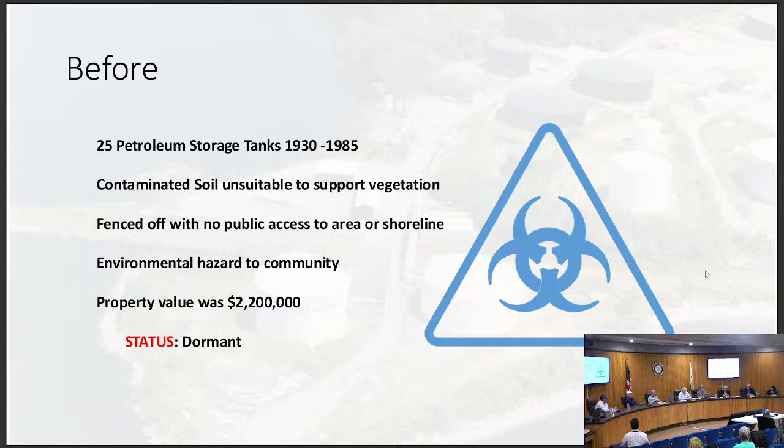The soil was contaminated and the site was fenced off. There was no access to the shoreline. It represented a real environmental hazard to the community, and the property value prior to development was assessed at only $2.2 million.

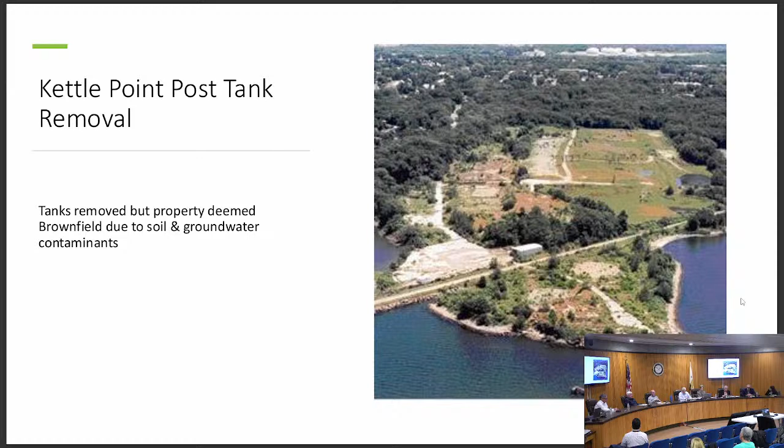After the development, you can see the site - the tanks were taken down in the mid-1980s. Even though the tanks were removed, the site was still considered a brownfield, and the soil and groundwater was still very contaminated. But you can see the outline of the property, the pier way at the front there, and where the train tracks went through the property, which now is the bike path.

Very interesting to see how despite the tanks, it looks like a nice piece of property, but essentially was still highly contaminated. As development began in 2015, 2016, I'll go through the different phases, but fast forward to 2024, we've got public access to the waterfront, 20 plus new parking spots behind University Orthopedic that service the East Bay Bike Path, and the new pier, a 600-foot boardwalk open to the public that gets a lot of active use in the summer.

Even all season there's 62 new townhomes, 228 apartments. From what I understand, all the townhomes are fully occupied, and I believe all the apartments are fully occupied as well. There might be occasional vacancies, but there's no large segments of vacant apartments. The new medical building originally had 225 employees, but I think they're probably over 250 now - it's a pretty substantial piece, a major part of University of Orthopedics.

Fast forward, this report will illustrate - when we started pre-construction, it was 2.2 million in assessed values. The property values through the most recent assessment report show that the values exceed $98 million.

Again, just to visually show what the site looked like before it was fenced off - even though it was fenced off, people made holes through the fence and there was access to our property. People were trespassing and probably exposing themselves to harsh chemicals, not knowing what was out there. As you can see in the other slide, it's a much more welcoming piece of property now with a very nice wall. And Ray, you were involved in the development there as well.

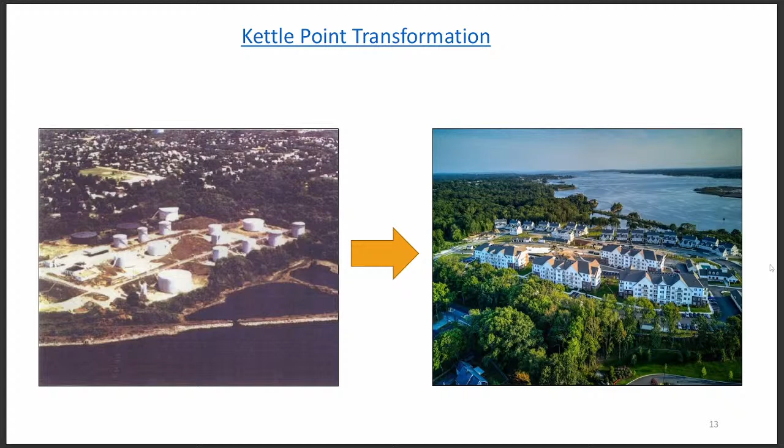This is a real life case study of when development takes place. Not all of the impacts are adverse - in fact, they're positive impacts. Obviously there are challenges, and different developments have different attributes, but I think this is overall a very good case study of a positive development leading our city, compared to something that was just vacant.

It probably would have never been remediated unless a local developer stepped forward and partnered with the city, where the city would make public improvements allowing the property to be remediated. From what I understand, it was like 30,000 cubic yards that was remediated at the site, which otherwise would have seeped into the groundwater, potentially very detrimental to the groundwater supply in some of the neighboring community and also the Upper Bay.

Just wanted to provide that. We'll have this on our website along with the independent report that shows these numbers. East Providence is one of the few cities that have done a TIF. We just have some examples of how TIFs work - these are just illustrative examples, but we have enough safeguards in place.

Even if the revenues don't support the debt service payment, the city's general fund or city's obligations are never going to be impaired. If there's a shortfall in the revenues to support the debt service payments, a special assessment would be placed on those properties within the district. So there's really no recourse to the city here. It's really been, I think, a net win for the community, and I just wanted to report that again.

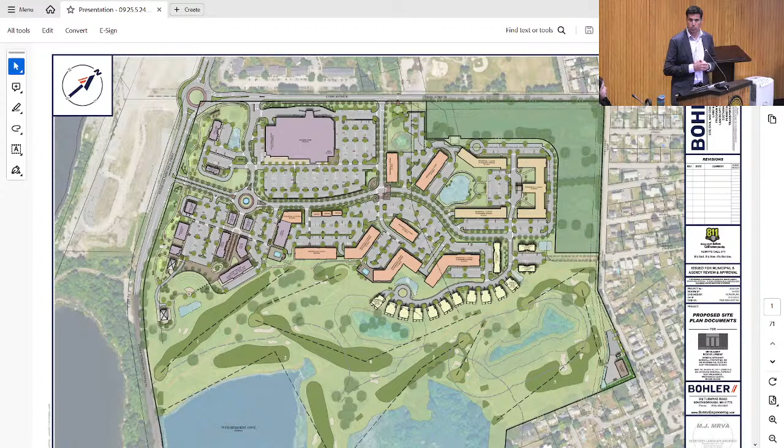What we need to do is capture and hold that stormwater and release it into the locations where it was already going before, essentially the same flow as it was before. So that requires storing it on site until it can infiltrate at a rate that would match the previous flow. Those calculations have all been provided to Pare Engineering. They peer reviewed our original submission, had a few comments on our approach, and we've made some modifications as a result. The new plans we believe are going to satisfy their comments.

And then, I know DEM isn't overseeing the stormwater aspect of this - is it CRMC? CRMC, yes. So they obviously look at the plans and see how it impacts the cove and runoff of that nature. They're being updated as these plans are developed, and they'll have oversight over this. Thank you. Any other questions?

Go ahead with the next witness.

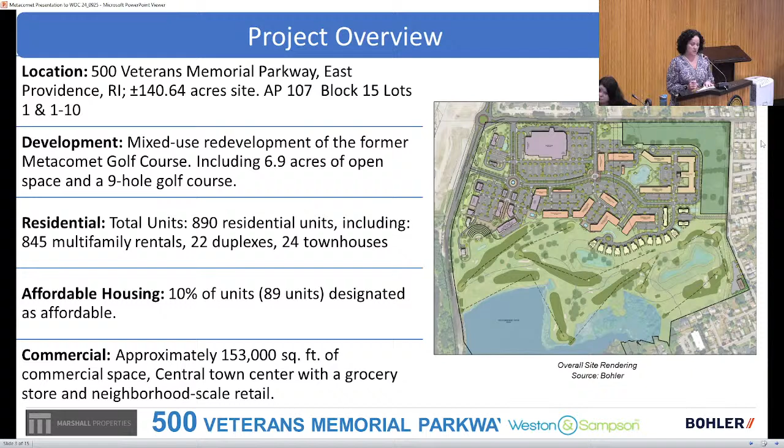So to give you a brief overview - some of this is a bit of a repeat, I won't go into great detail - we're talking about a mix of commercial, retail, residential space, open space, and recreation space. The project attempts to really try to fit into the fabric of the neighborhood, pushing buildings back along Veterans Memorial Parkway with a roundabout at the intersection of Lyon Avenue and Veterans Memorial Parkway. There is a report from Forward Planning, which I'm sure you've seen, that speaks to the general tax revenue that can be expected and the job production that would be created, with over 3,500 temporary jobs for construction and 630 permanent jobs within its first year of stable operation.

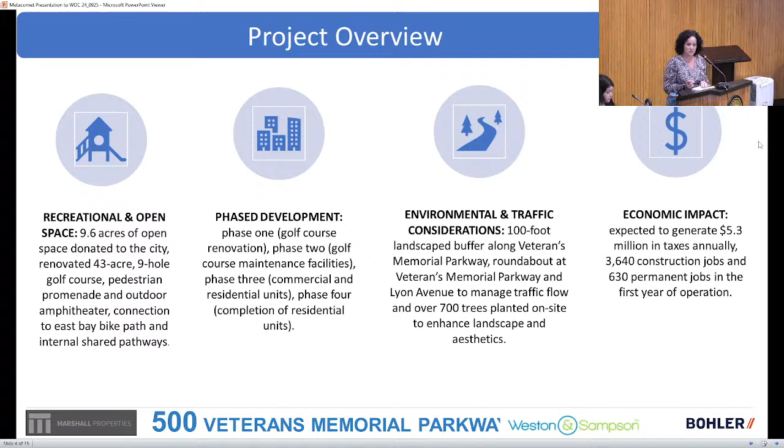So I wanted to talk to you a little bit about consistency with the zoning ordinance. This project is requesting 3 variances from the zoning ordinance, and I wanted to go through those with you and speak to those.

One of those is for a signage variance. This is to install a monument sign at the entrance. The district calls for signage to be placed on walls, not monument freestanding signs. The reason for the request is that if we were to put signage on the buildings, they would be set back over 100 feet from Veterans Memorial Parkway. We would prefer to request the variance for the monument signage at the front entrance, and allow those buildings to be set back. The intent is to protect the scenic view on the parkway.

The sign will be built at a reasonable scale to fit in with the character of the parkway and the signage that is already there. There is monument style signage on the cluster of buildings adjacent. It would be similar in form and function, but allowing a monument sign instead of requiring that signage on the side of buildings will allow those buildings to stay back from Veterans Memorial Parkway, which we feel is an important aspect of the project.

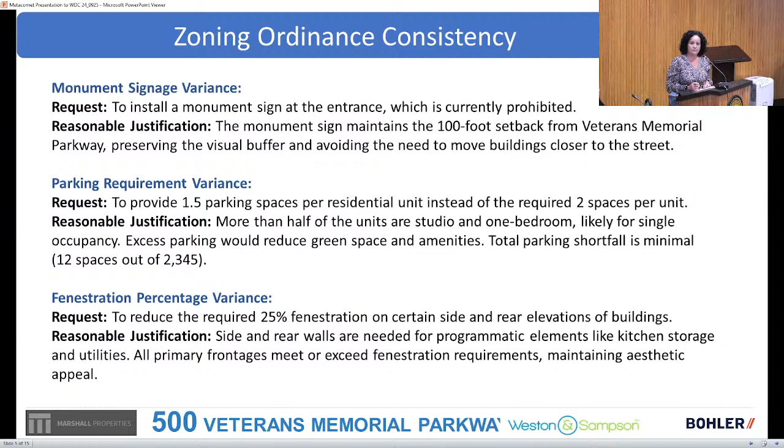I also wanted to speak to you about comprehensive plan consistency. In the report, there is a table, table 2, which starts on page 10, that goes through certain elements of the comprehensive plan, provides the text from the actual comprehensive plan, the location of that text, and then a comment as to how we believe this project fits with the goal, the policy, the action, or just the general text of the document.

So what I've done for you in the slides is just give a very high-level summary of each chapter highlighted in this table, the general requirements or requests for development, and some examples of how we meet those. The table itself goes into a lot more detail, and I'll go through each of the sections at a high level.

The first section is the general plan, which is the text and discussion that happens outside of one of the specific chapters of the plan. It talks about ensuring a quality of development. In this project, we're providing a range of housing, service businesses, open space, and recreation. It is truly a mixed-use style of development through high-quality design, so we feel this proposal meets that call for high-quality design.

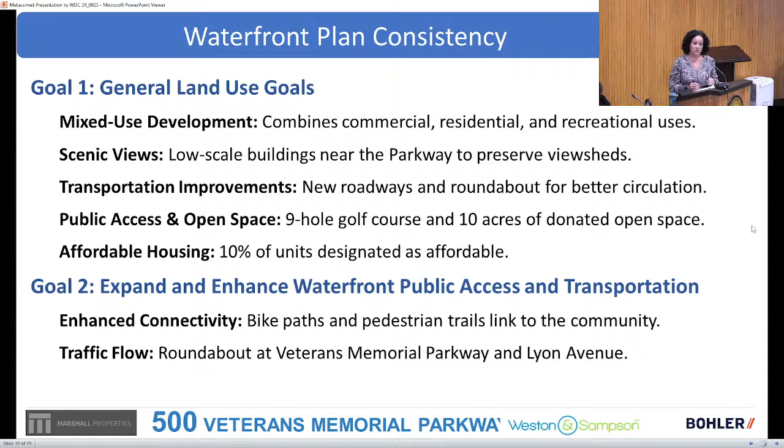Goal 2 speaks about expanding and enhancing waterfront public access and transportation, specifically enhanced connectivity. We intend to have those shared paths connect directly to the bike path. It also talks about traffic flow. There's a proposed roundabout at Veterans Memorial Parkway and Lyon Avenue, which is identified in the waterfront plan as an appropriate traffic mechanism, noting that traffic signalization is not appropriate. The comprehensive plan, in the specific district for this area, also identifies this exact intersection as the location for a roundabout.

Goal 3 is to enhance the waterfront special development district's economic development opportunities. A lot of this is similar to the comprehensive plan, as it should be, since those documents should work in concert. It talks about business attraction, supporting new businesses, job creation, and creating year-round activity on the site. We believe that with the mix of uses being proposed, we are ensuring continuous year-round engagement on the property.

Goal 4 speaks to enhancing the attractiveness of the project area, specifically providing for structured parking. While this project does provide some surface parking and some structured parking, we've designed the surface parking so that it is not vast expanses of asphalt, but broken up into segments with sufficient landscaping throughout to really create a feeling like you're not in a giant park.

It also speaks about public spaces and well-defined streetscapes and gateways, with the installation of a roundabout at that primary intersection. We believe that would essentially create that specific gateway bringing people through Veterans Memorial Parkway and into the city via Lyon Avenue. It also talks about pedestrian and bicycle infrastructure. The plan is designed with sidewalks throughout, and a connection to the East Bay bike path across the street through the shared path system designed for it.

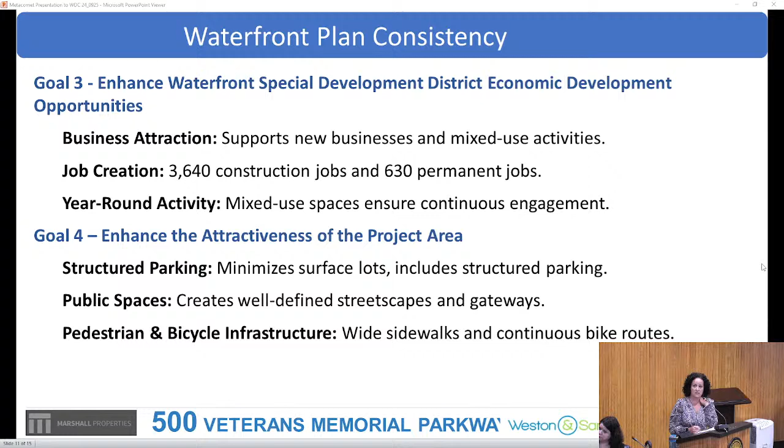Goal 5 speaks to protecting and enhancing the natural waterfront environment. As I said, we are staying away from the cove, staying away from the more natural and environmentally sensitive features on the site, and maintaining a buffer zone, limiting development away from those.

Goal 6 speaks to revitalizing existing commercial areas, enhancing the appearance, and creating a gateway. As I said, the roundabout at Lyon Avenue serves as a key entry point in all directions, giving you access eventually down to the parcels right on the water.

Goal 7 is protecting existing residential land uses on Roger Williams Avenue and Veterans Memorial Parkway. As I said, there is proposed to be at least a 100-foot landscape buffer along the parkway to maintain the greenery as you drive along it, along with traffic mitigation measures, such as the roundabout, managing the flow of traffic to prevent shortcuts through residential neighborhoods.

Now I want to talk a little bit about the context of the neighborhood adjacent to the property. To the northeast, you have existing medium density residential development. The project attempts to preserve that current view. This is the area with an almost 10-acre donation along Fort Street, maintaining that neighborhood character and keeping buildings set back from any adjacent residential uses. The first set of buildings on that side of the site are also residential.

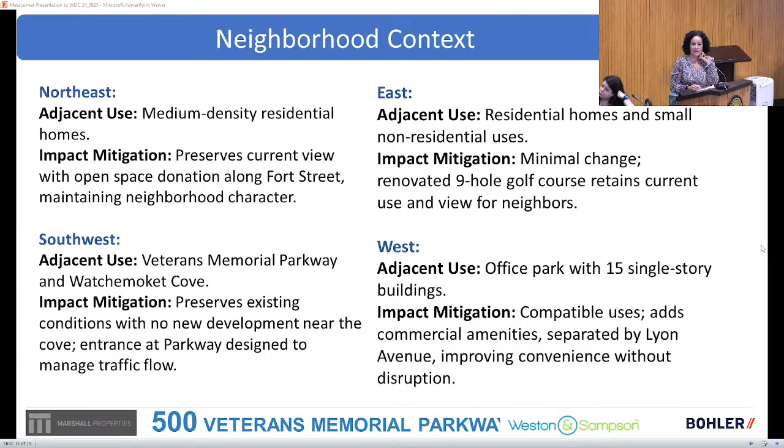To the east is also residential homes and small non-residential uses. We again believe there will be minimal change there, and they'll retain their current view of the golf course area. To the west is the small office park I mentioned, with single-story buildings. We believe the uses proposed will be compatible with this adjacent use. They are separated from the property by Lyon Avenue and would improve convenience between the two compatible uses without any real disruption to what is happening in that office park area.

So just to summarize the findings as we went through your regulatory documents and compared them with the proposal in front of you: we believe this project is appropriate and compatible in scale, proposing traffic and infrastructure improvements already contemplated in your waterfront plan and comprehensive plan. It achieves or partially achieves open space goals by obtaining 9.6 acres for the city to hold title to and preserve. It enhances recreation by opening what was previously a private golf club to the public, provides a mix of uses with residential, commercial, open space and recreation, capitalizes on a redevelopment opportunity while maintaining recreation space, provides a positive tax base, and establishes over 600 permanent jobs at a variety of pay scales, plus needed market rate and affordable housing.

So in conclusion, we've found the project is consistent with your zoning ordinance, subject to the variances requested, and we've provided rationale for those variances in the report. We believe it's consistent with the goals, policies, and actions of your current comprehensive plan, and also consistent with the waterfront special development.

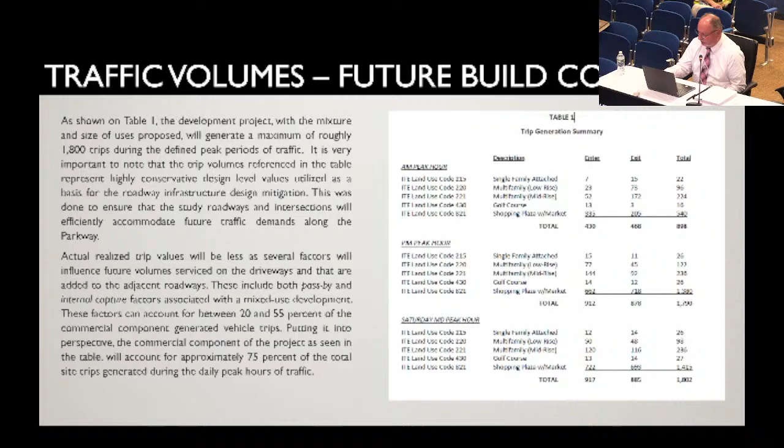And we show what a future potential would look like, so you understand the type of numbers that use would actually generate minus all the pass-by. So we wanted to demonstrate that and use it as a basis of our analysis.

The commercial component, which represents roughly 75% of the peak hour traffic, would have a distribution that's more even than, say, the residential use. So you have the morning commute.

Commercial component opens up mid-morning to late morning, to the midday period, which is a higher or average condition. That six hours between 10 and 3, 10 and 4, volumes would be relatively consistent. Wouldn't have a high for that.

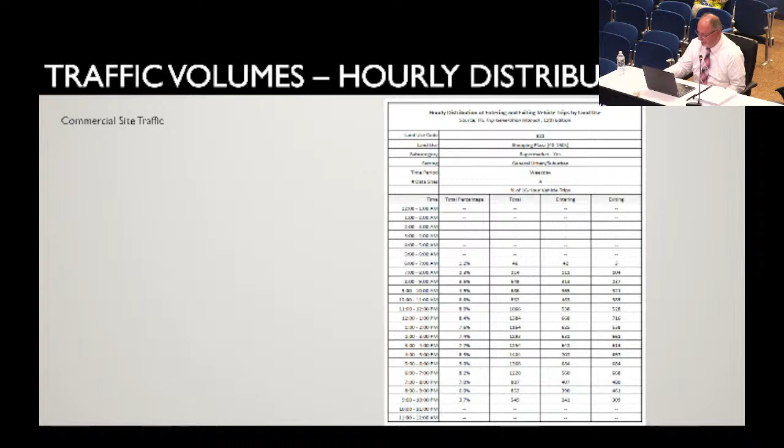Once we estimated the type of traffic relative to volume, we had to estimate where it's coming and going. The commercial component, with the grocer being the anchor, we anticipate this component of the project being a neighborhood type commercial element, a shopping center. Most of the people in surrounding areas are presently serviced by shopping centers, the markets on Morton Ave, the Shaw's, the Stop and Shop, or the Route 6 corridor in Seekonk - Stop and Shop, BJ, Walmart, post Whole Foods. So that area of the community is highly serviced with this type of use.

The area to the south is void of a grocer or competitive grocer. Going south into Riverside, Pawtucket Ave, Willett Ave, it's one market - an outdated, small Shaw's, prices that are high, quality and quantity of product is less than when you have a highly competitive market across the street.

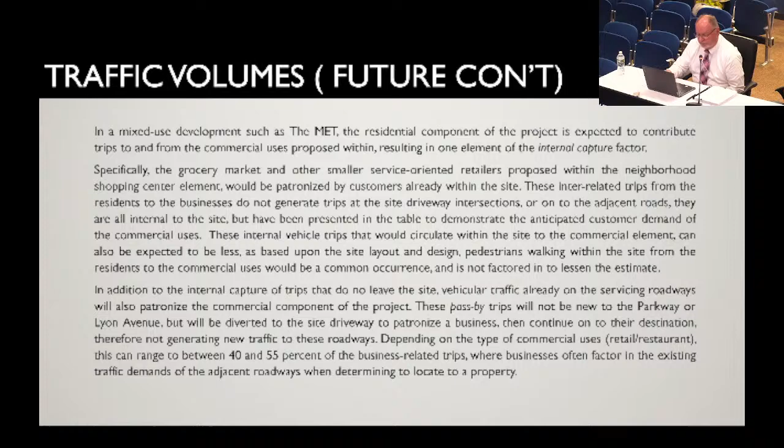Looking at that, we provided figures in our report that showed the distribution based on that type of analysis of where our competition is, what the servicing roadways are. We looked at different distributions for the residential component and commercial component. So that's all been included in our study, and figures are provided for each of the periods.

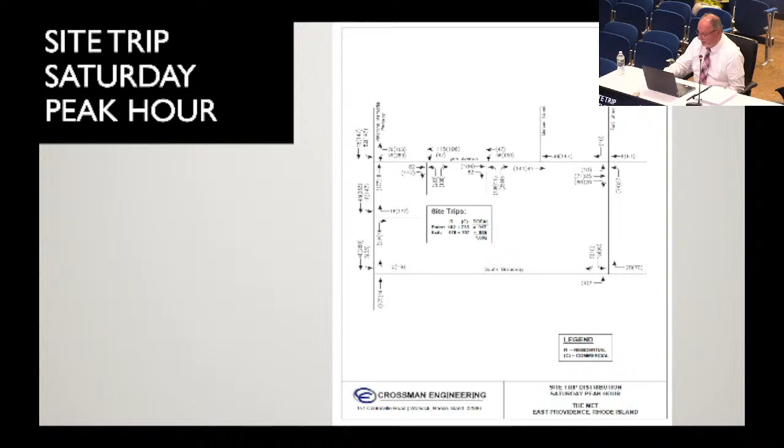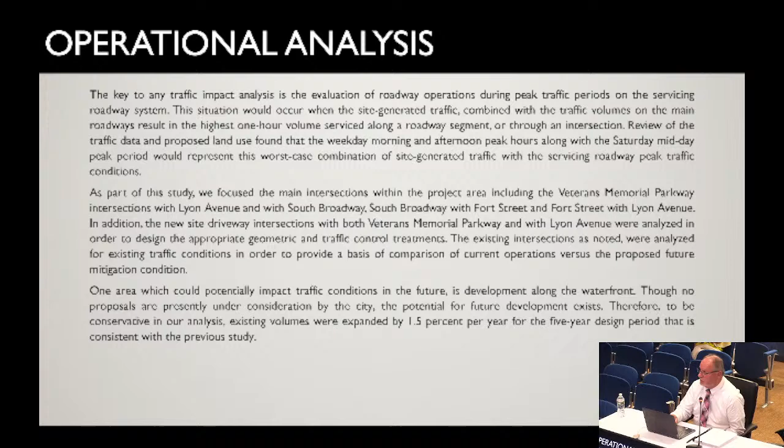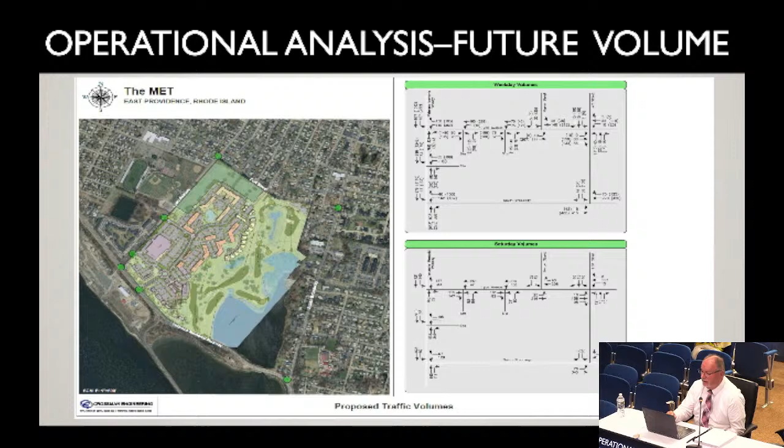In the report we show what that distribution and overall volumes are. The slide shows the development itself and then the key intersections we have. Based on that future condition, as presented in Figure 5, we determined that improvements were necessary along the Parkway. As I indicated previously, it initially had proposed control at a driveway on the Parkway. When I got involved and worked with the team, having knowledge of the Parkway, we redesigned the access to the property.

So it did conform to what was considered over 20 years ago, to provide future access to the waterfront, but also service this development up on the Parkway. So we've proposed the roundabout at Lyon Ave. Our main driveway will be restricted from left turns out, so we're just shifting an existing driveway that has full access to a driveway on the Parkway that has a restricted left turn exit and access.

Primary southbound egress from the site will be from Lyon and through the roundabout. So we feel that the design proposed will be consistent with the goals that have been discussed for the Parkway and access to the water.

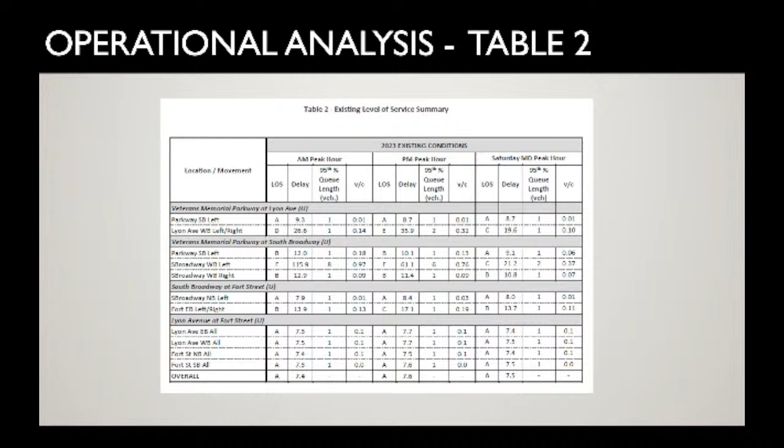East Bay Bike. The operational analysis we've presented shows both existing conditions - the level of service internally within the neighborhood, the intersection, level of service A today. The only intersection that operates at a lower level of service, or movement I should say, is the South Broadway intersection. I was involved in that back when the Bold Point was being considered.

That's when I worked on restriping the roadway to provide the left turn. We couldn't before, so it would back up, or people would drive on the shoulder, on dirt, to get around. So it's just a better operational condition, what we're proposing there in the future, and it was also recommended in peer review. Geometrically it's odd, so we're going to make it a conventional T intersection.

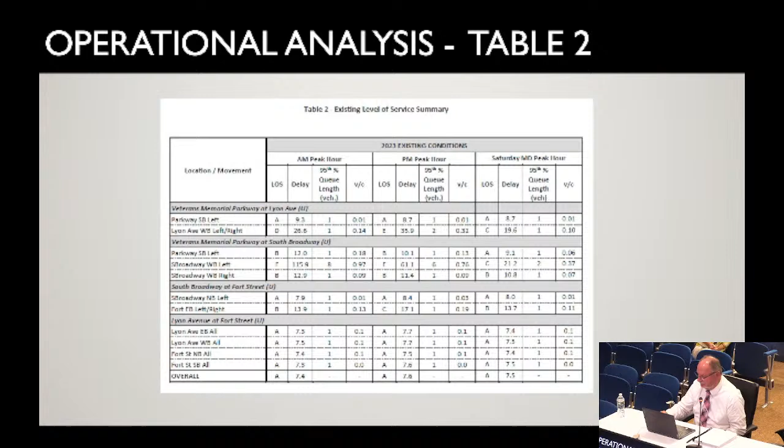Modifications to reduce speeds through the intersection help people drive along the parkway up Broadway. With the concern, feedback speed limit signs have been put on South Broadway to help with trying to moderate speeds. So that is a concern.

Under future conditions, that will remain, but we monitor that with the Department of Transportation to see what, if anything, needs to be done relative to operation. But the roundabout itself will operate efficiently, and all the internal intersections as proposed.

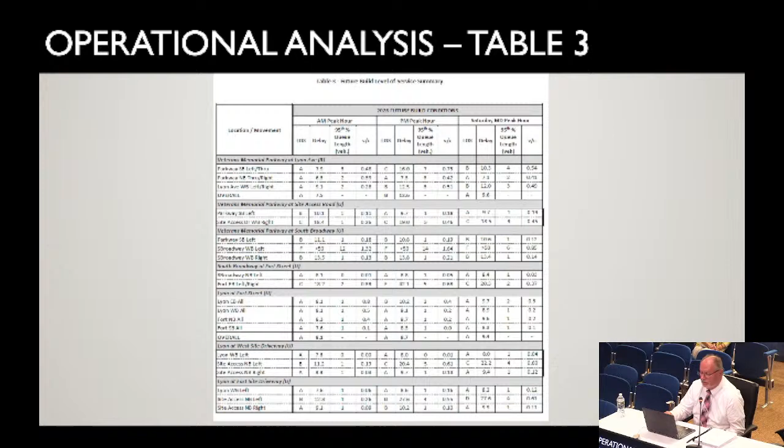We'll work with the city in an effort to mitigate cut through and intrusion within the neighborhood, at Mercer Street. As part of our initial application with the DOT, coordinating with Public Works, we would propose to restrict that intersection with the parkway to a right in, right out. It's configured as an old type Y intersection; we can go left or right for both approaches, so it's an easy fix.

Safety is a concern at that intersection because sight distance is insufficient to the south along the parkway to make that movement. So that'll remove that potential cut through between our site, and that's an initial element we will include as part of our DOT submission.

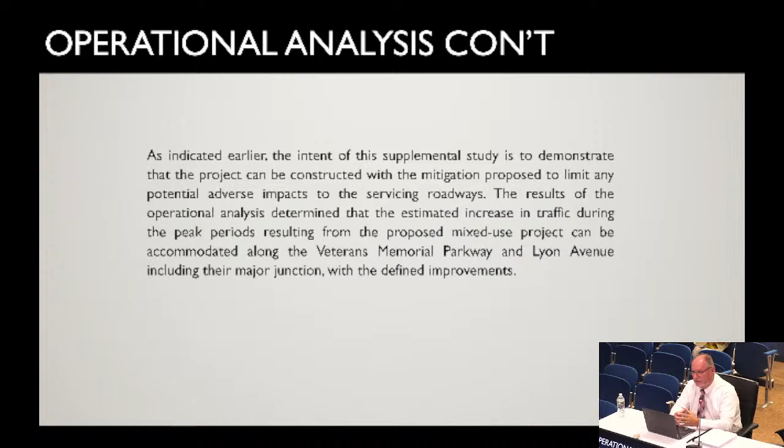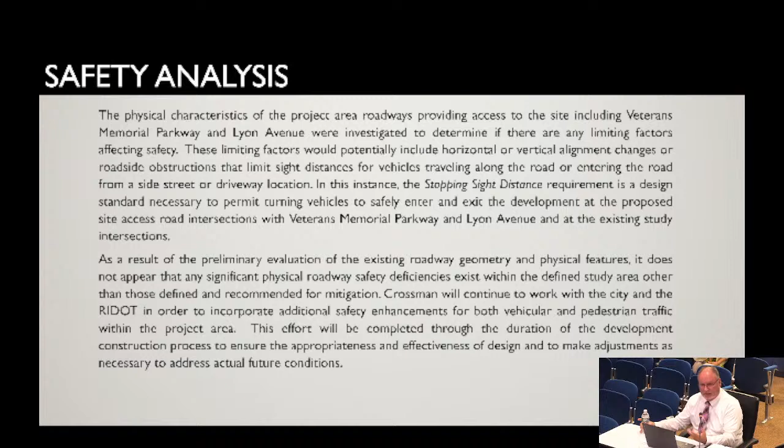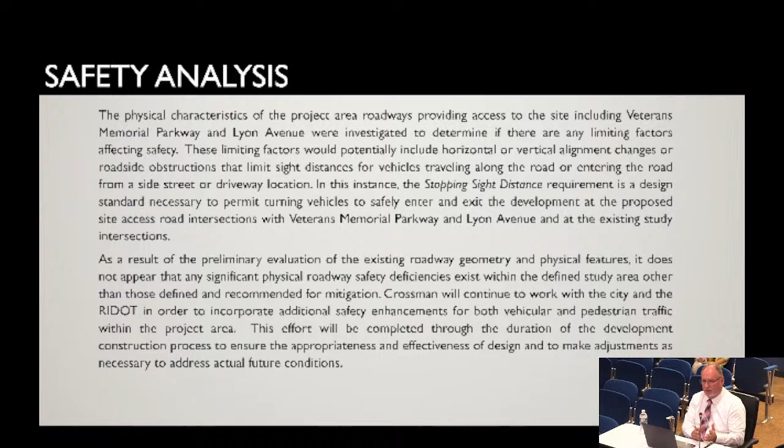In addition to operational analysis, we were requested to do a safety analysis. So as part of the updated report, we've looked at sight distances, driveway intersections, also design of the roundabout, designs to provide for efficient movement. We'll provide those as part of our report.

At this point, we've provided a comprehensive report, submitted to the department, and received a letter from them regarding what we've proposed. That letter, received back in June, will allow us to submit a formal application with the actual design of the roundabout for final approval.

As part of that submission, one of their comments was that it's typically a requirement on DOT projects when we do roundabouts internally that the roundabout be coordinated and peer reviewed with an independent, separate consultant. So in retaining the designer, they will work with us to provide the documentation needed in the design process for a roundabout.

They'll also do a VISSIM analysis. That's a computer program that allows you to provide detailed design treatments of a roundabout, particularly some peculiarities of a roundabout that are detailed in the VISSIM analysis. You'll be able to see how that's provided as part of it.

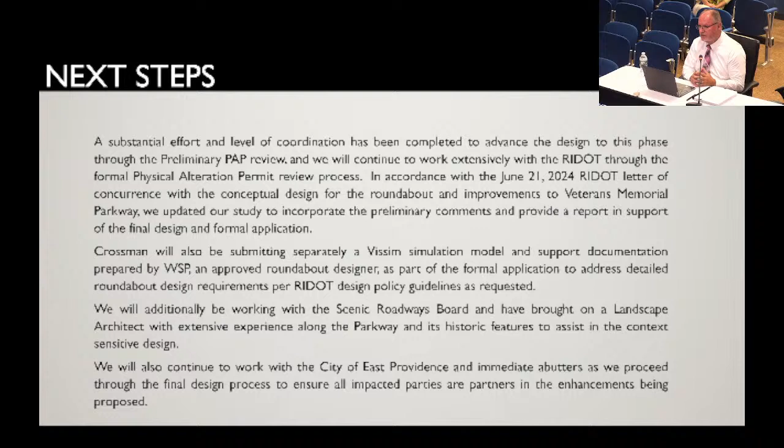Safety enhancements and traffic calming measures - we'll continue to work over the project development to make sure that happens. On Versa Street, we discussed options with Public Works to include modifications around the school and field complex that would essentially eliminate traffic from our site. That's a long-term solution we discussed.

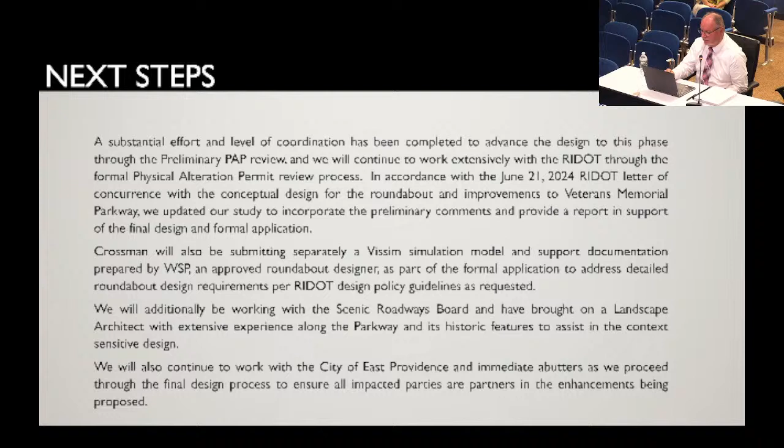Our driveway - we're working on the design of whether we have a separate left lane or two lanes to the roundabout. That additional lane will be a right turn in at our property, and then the right turn out of our property will pick up and create that second lane. Going through the roundabout, it'll be a two-lane roundabout on two sides, on the southern side.

Each approach will be two lanes. We'll be designing it for that future access, which was a requirement for the DOT approvals, that we would consider that future access leg of the intersection.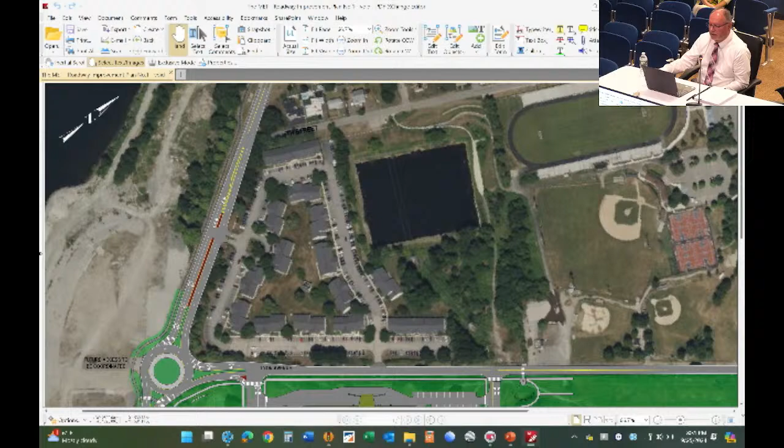And as you go north, the transition from the driveway - safety at the office park driveway - we're transitioning to two lanes heading south. We're going to put in a left turn pocket lane for them so they're not taking their lives in their hands as they do today. So we're providing a separate lane along Lyon Ave where we have our driveway component.

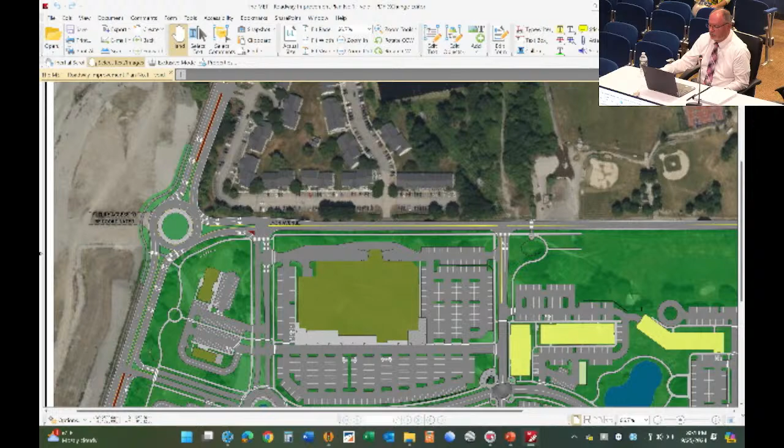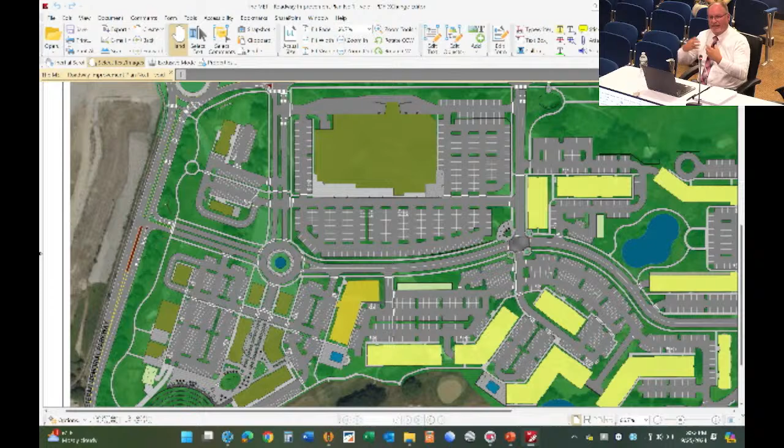The VISSIM analysis will show how that will operate, whether we make any adjustments relative to offset distance in the roundabout and our main residential driveway. We also have a lot of internal connectivity, so internally on the main roadway, all the traffic that's in the site doesn't need to go out. We have driveways offline with actual pockets. Same with the residential, there are multiple driveways. So the main intersection, which is a four-way stop, the eastern driveway will operate efficiently, and all the traffic into the site will be accommodated.

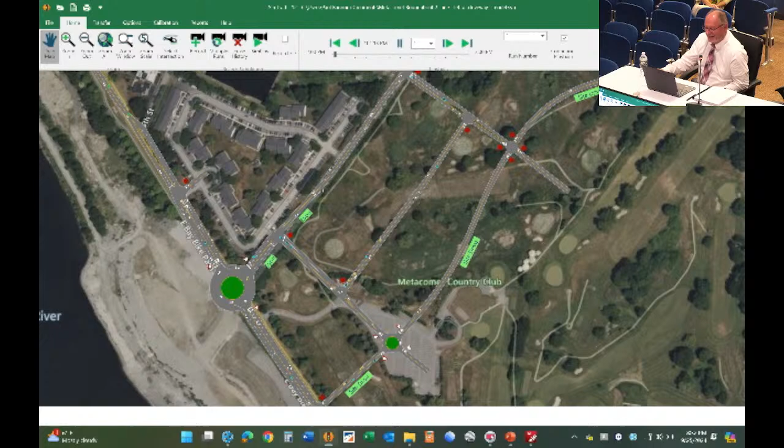This is a simulation that we use. It shows the operational analysis that we have completed in the study. This is a product of that analysis, so we use this to show the results.

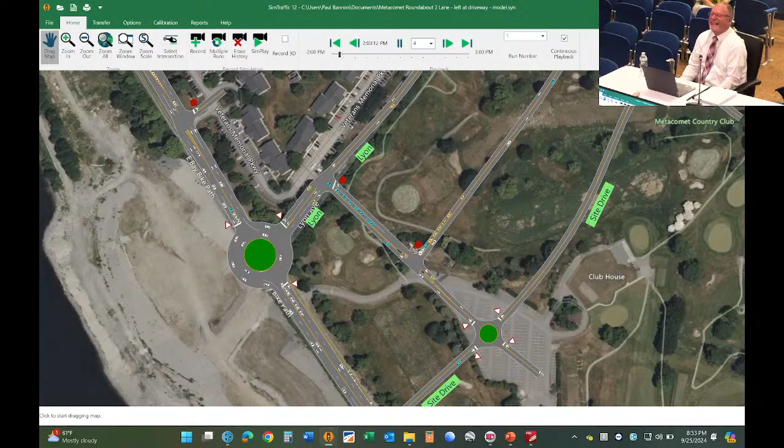You guys don't look at the screen, you're gonna miss it. Oh, it's right in front of them? Oh, okay. Oh, sorry. Wasn't here early enough. You guys were.

We use this tool to confirm our design relative to the traffic signal, that it operates properly, that one approach isn't overloaded, and to check stacking lanes - the length of stacking lanes required if the queuing exceeds. We use this as a design tool. The VISSIM analysis is on steroids for this - this covers basic radii and lane widths, while the VISSIM analysis actually uses the actual CAD chart to simulate road layout. This is a tool we use.

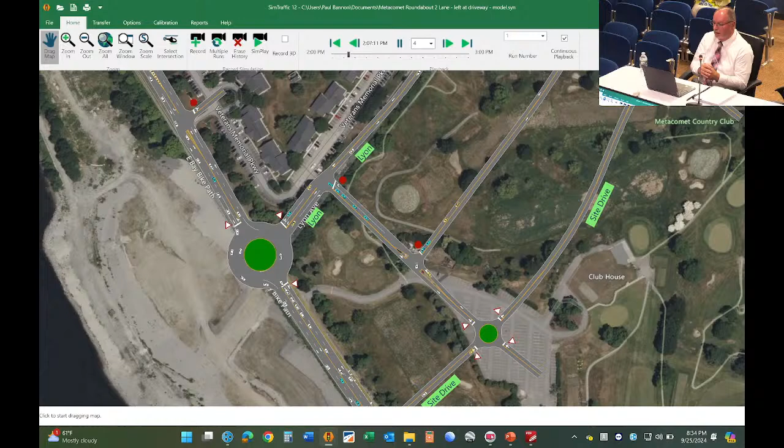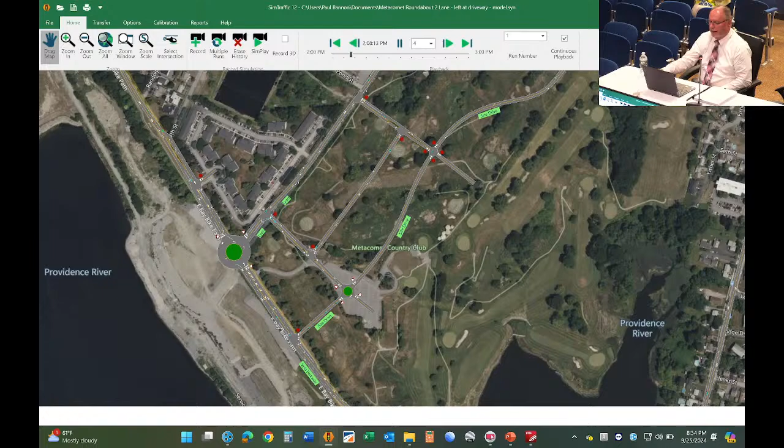We also provide the public understanding of what we anticipate. This is a Saturday condition, demonstrated both internally and on the parkway, showing kind of the volume and speed that would be realized.

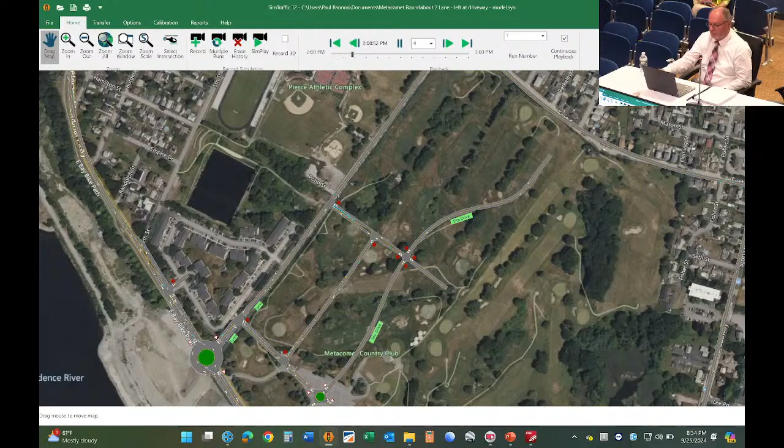With that, I'm available. A lot to absorb.

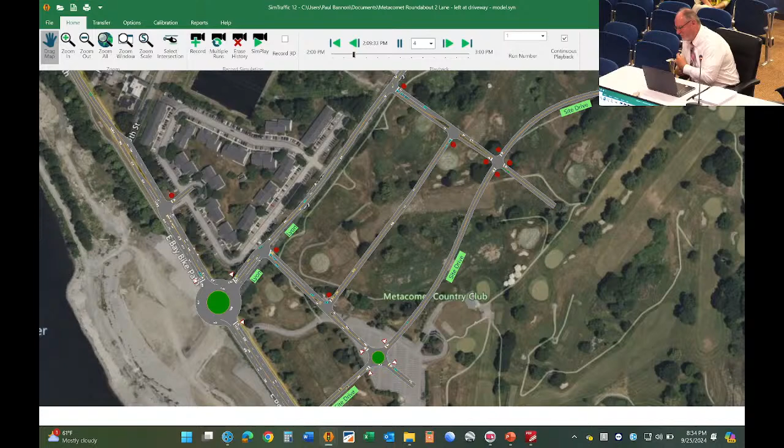So just to back up a bit, Paul, this latest report is a composite of all the previous reports, bringing all the comments and input to this next level. This is reflective of all the other studies that have been done.

Correct. Our initial study was focused on the DOT permitting aspect, but it did include information on the local level, on the streets, because of the overlap. But we wanted to provide the city, based on review comments, more detail relative to the city component or element of the project. So that's what we've done as part of it. We didn't want to reinvent that old study, so we supplemented it with information relevant to the city and addressed the peer review comments.

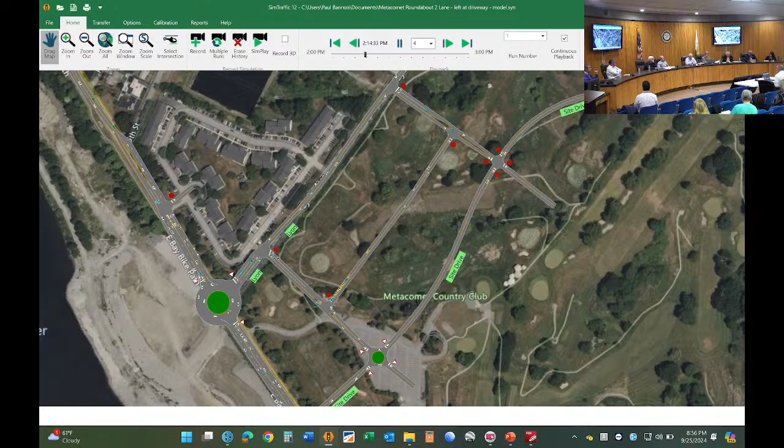And you mentioned that the base data traffic count was collected in 2023 for the Parkway. Correct, and the peer review is in agreement with the volumes that we have. That data indicated that the average trips per day, or vehicles per day, on the Parkway are 16,000 to 18,000.

So just to break it out, most of the new traffic would result from the commercial component, not necessarily residential, since that's obviously morning and evening. But typically, what would you see as far as new vehicles per day from the commercial pieces? We would look at probably 30% less traffic than what we presented in the study - actual conditions would be 30% less because of internal capture and pass-by trips. So you're looking at 6,000 to 6,500 vehicles entering and exiting the property on a daily basis.

That traffic isn't focused on one point - it's 40-50% this direction, 40% this direction, 10 here, 10 here. So there's no point along the Parkway that's going to see a 6,000 vehicle increase.

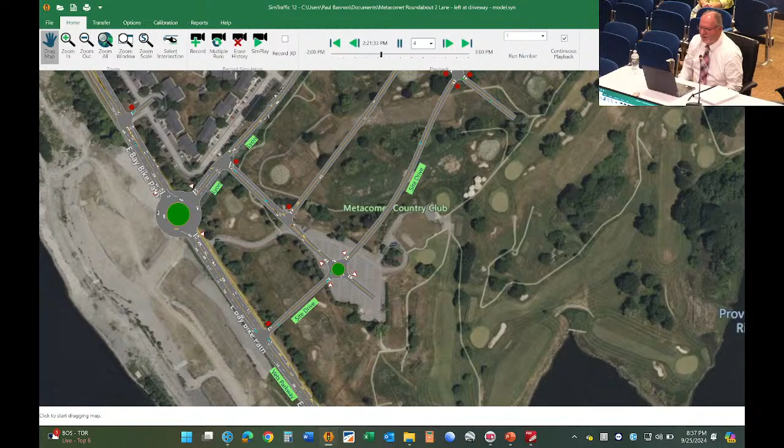And then you mentioned on the rotary here, the roundabout, it's a right-exit only heading south, right? If you're inside the development, from our site, our access on the Parkway, you can only turn right. So if you want to go south from our property, you have to go up to Lion, take a left, and then take a right. So you have to go down to Lion and then enter the rotary to go south. So if I say rotary, I mean roundabout - DOT wouldn't like that, you can say circle or round.

And then you mentioned on Lion there are two new access points - one closer to the roundabout, and one more towards across from the Jones's Pond area, that National Grid easement, just before the Pierce Field ball field. Right, and that's really meant not necessarily for commercial traffic, but for people accessing the residential. That will be the primary entrance for the residential.

They're situated on either side of the commercial. Anybody from the Parkway, north or south, is going to use either our main driveway up the Parkway or that first entrance. Anybody going to a residential is not going to go through the commercial component. They're going to enter and drive out of these.

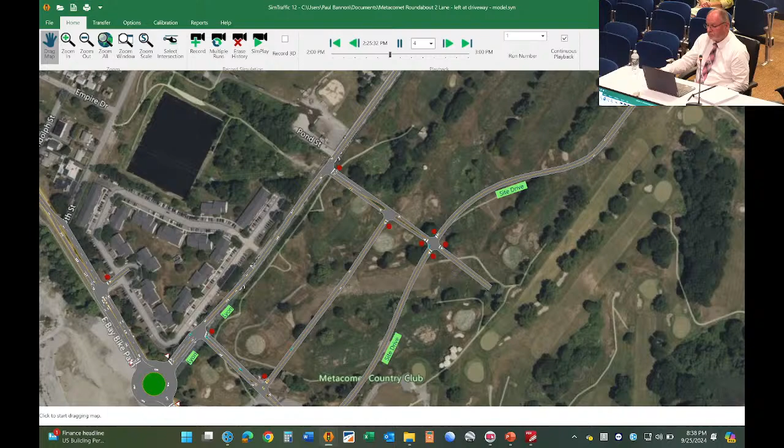And none of the roads access Fort Street, right? It's on Lion. So Fort Street's in the back. Yeah, just to Fort Street, that's an emergency gated access.

And then you mentioned Mercer and the Parkway. I know we had some testimony, I know we're hearing some people concerned that Mercer would be a cut through as you come off the Parkway. You take that really sharp left. I've done that for the last 35 years. It's a daring left, but yes.

You mentioned there's mitigation efforts to kind of address that. Yes, we've talked with Public Works and they're in full support of that change to make it a right in, right out. It will improve safety in the intersection. And it's very easy through signing and striping because it's actually configured that way. Right now it's rare that you see somebody taking a left onto Mercer to get on the Parkway, but it's allowed. So the idea would just be to make it a right turn only.

Okay, and then one of the other questions I had was you mentioned delivery trucks in the previous hearing. How would you propose folks getting to the grocery store with delivery trucks? How would they access that? That's all up the Parkway into the loading dock in the rear. I think going through a presentation of the loading docks.

Use the screening, berm, fence, trees. The loading docks are in the rear, which would also be set back from 195. Yeah, I mean, there are trucks on the Parkway that are box trucks and different trucks, but I don't really believe there's any tractor trailer allowed on the Parkway. No, only to deliver to a site.